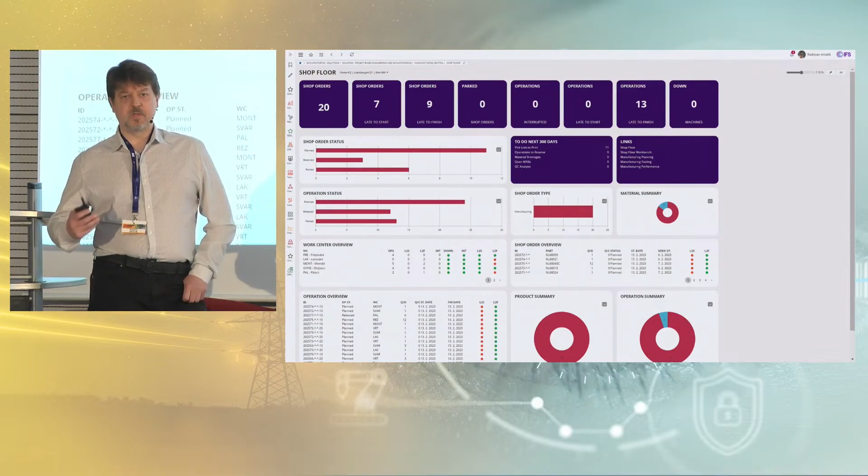This system works on the principle of controlling processes on the basis of exceptions, because the things which are running well I don't have to work with, but I have to deal with those which show a problem, for example with employees' attendance or other issues, so that we can find the cause.

When we received this new generation, we were quite excited, because it was an application which is able to control the entire life cycle. It means that this is no longer closed in a box, but a system which can control any processes, any areas, starting with an idea.

As an example, take a company which develops, supplies, installs and services different technology, production lines, etc. Such a company works with all the processes: development, design, production, and servicing. Now I will show you the phases. These cycles can be supported by a uniform system.

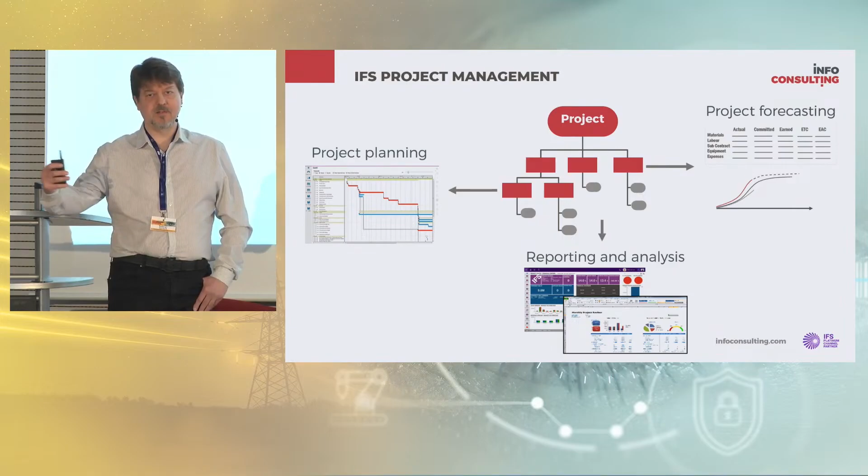The IFS project solution is based on the fact that all the processes connected with the implementation, not only production but also preparatory phases such as design, structure, TPV, and installation, supply and installation, are all controlled within the project. There is a possibility to follow project activities and create forecasts, project costs, project revenues, so there is always information available on the current status of the project.

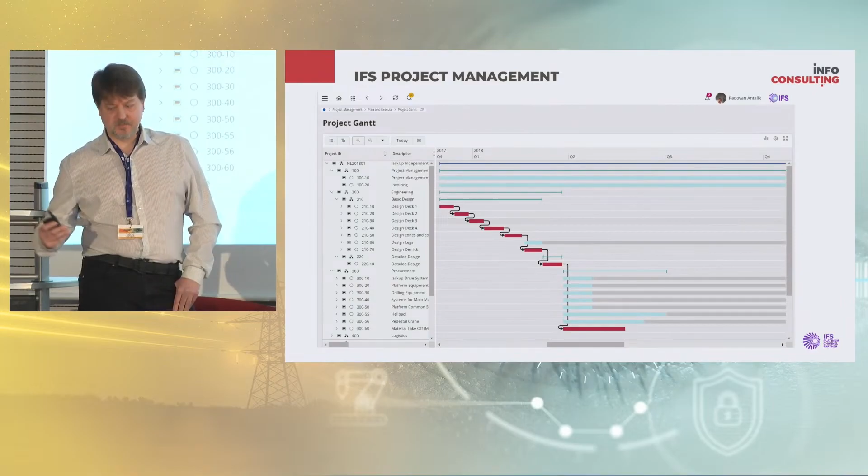And this is what it looks like. The project management looks like this. We have some project activities which have their own deadlines and estimated hours, and within the project management there is an allocation of resources.

There are some specific designers, and one designer can work on multiple projects. You can find out what designer is working on them, which projects he or she is working on, etc. I started with the designers, and now I will talk about the next phase in the life cycle, which is the development.

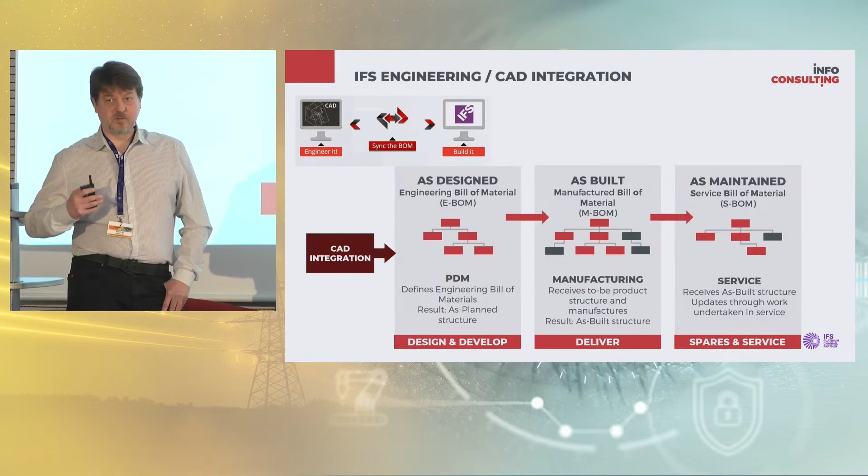At the beginning, when we start the project, we need to prepare the production documentation. New drawings have to be made, new models have to be made, and in this process the system integrates all this construction data.

The life cycle of the product is based on the fact that there are three types of structures, three types of bill of material: EBOM, MBOM, and SBOM. The bill of material data is then supported by the technologies, and the production documentation follows, according to which the production starts.

In the production process, changes occur because the customers may require change, the designers may require change. So in this moment, the actual bill of materials is used, and the serial numbers are followed, the batch numbers, and you will see how the production line was manufactured for a technical equipment of some kind.

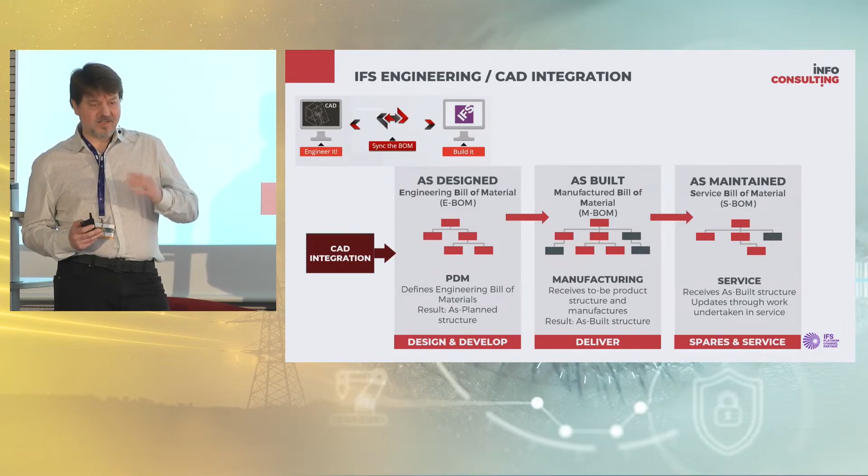The bill of material which was established is then reflected in the service structure, and this is the service bill of material, for the equipment to be able to be serviced. You can see there was a serial number, and everything can be found in the system, until the equipment is out of service and decommissioned.

In order to make a comprehensive control of this process, IFS has introduced a methodology called project deliverables. The principle of project deliverables is the bill of material, which is the order where you upload the data. The project deliverable is related to a project plan - what time, what branch, what section you need to process. On the other hand, design transfers data to the system.

So that based on the data you can start the production. The principle is that you don't need to have the whole bill of material ready, not all the layers, but gradually you can keep adding the parts in the project deliverable, those that have been configured. This project deliverable is then how you can start procuring and producing based on the design documentation, and plan the deliveries to customers, shipments that need to be delivered on site, and of course work orders for the equipment to be commissioned at the customer site, to go through the factory acceptance tests and all other things until it's been put into use.

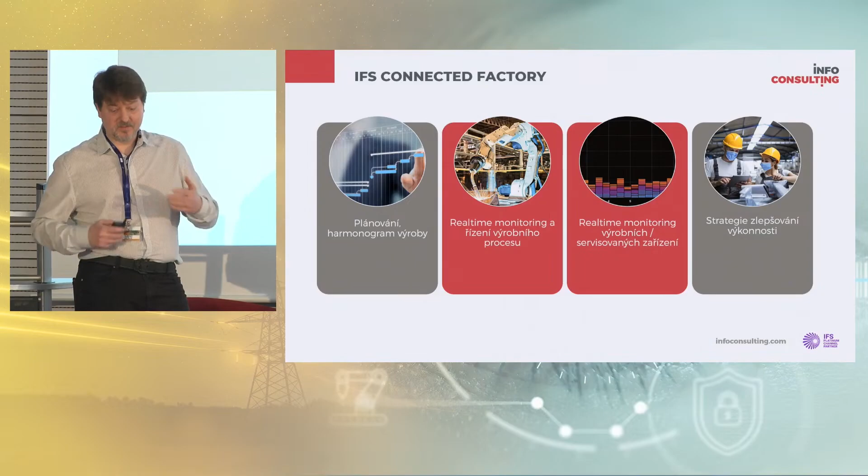Then we have real-time monitoring of the production process and related production monitoring, and then with the incoming data from production, the system keeps evaluating the data and brings supporting data for decision making and for improving the efficiency of the production process.

So the solution itself is part of a single system. So the user in the production uses a single system. The advantage is that the data is consistent, so you don't have complicated business topics, no interfaces.

So this system can also integrate some third-party solutions. So this is an open system enabling cooperation with other software.

Another benefit is the cost of the solution and the cost of maintaining the solution, because you have a single vendor, single provider that also provides the servicing. So you only communicate in one direction.

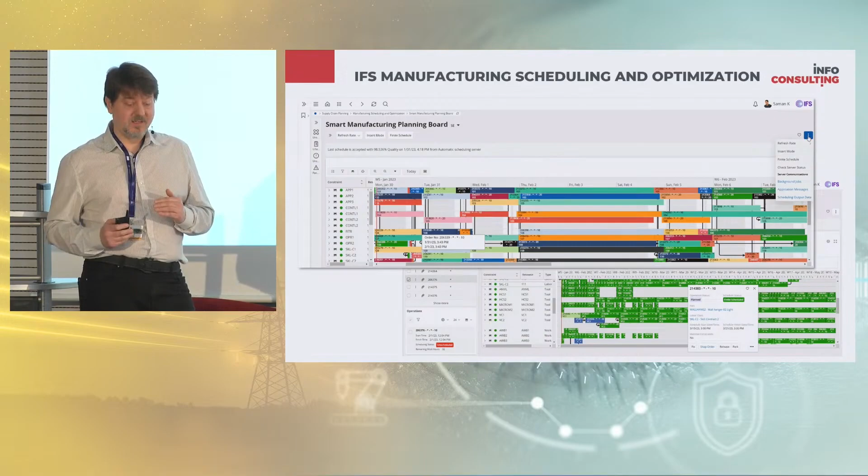So if you look at the details of the components of the MES system in IFS, of course a very important layer is the detailed capacity planning, where the system keeps evaluating, rescheduling and changing the production plan based on the accessibility of materials, machine availability, manpower availability, or tools availability that are needed for the operations.

And as a result of this detailed planning, you get a real-time operation line for each production workplace, so the data is immediately accessible for the workshop management, which is a tool running in the workshops where the foremen really work with the operation line, with the queues, and they manage the system based on the data collected on the shop floor.

And of course, the data can be collected by the operators if it's some human work. It's also very important that once you have some production facilities integrated in the system, the data flows to the equipment to know what programs should be used in CNC machines and so on.

And on the other hand, you get information from the machinery about the production, and you also get information about the diagnostics of the equipment, so that the maintenance staff also has information about the condition of the equipment.

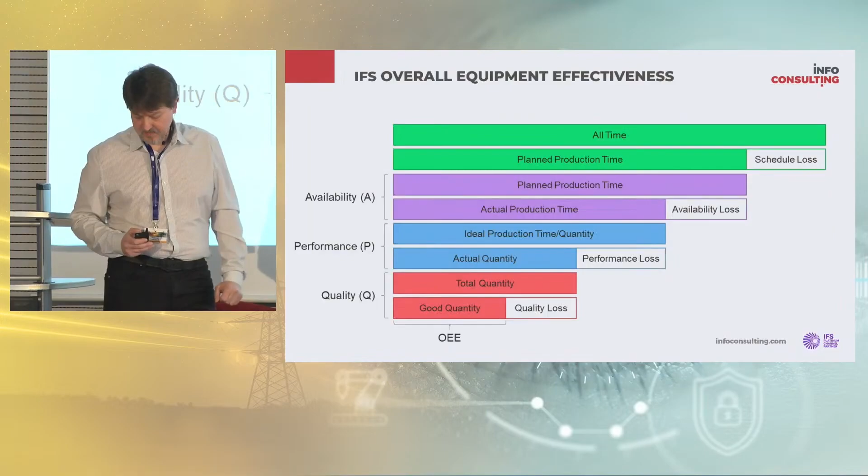So the operators can use a workshop panel. This can also be used on any device, mobile phones, tablets, and on the huge touch screens located on the shop floor. As regards data collection from the production equipment, the greatest benefit of the monitoring is...

OEE. So this is when you evaluate the availability of the production machinery, meaning how long the equipment was in operation, what was the downtime. And this is, of course, related to production, where the system evaluates the production, how much has been manufactured, and the losses.

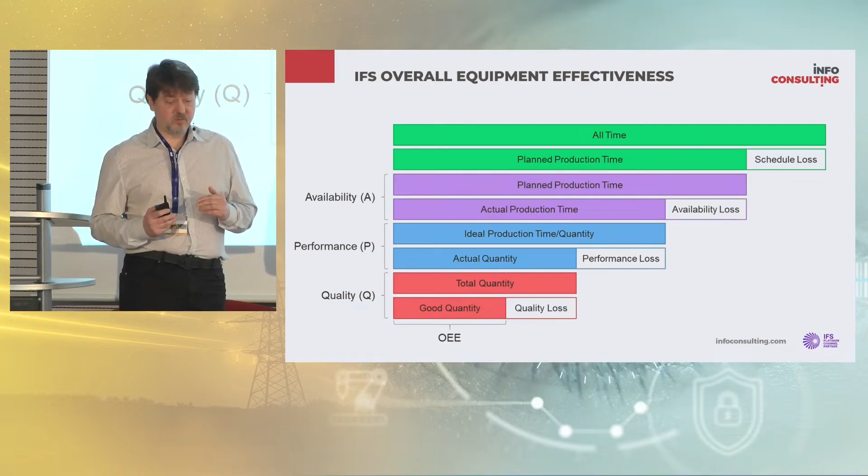And the last indicator is the quality. So this shows how many produced pieces were good, and the number of faulty pieces. Then you get a calculation, and the production managers get a detailed analysis of the condition of the equipment.

Another important component which starts being implemented at the stage of development is quality control. And this is based on FMEA, where you can already specify some potential errors or defects in the processes, and based on that you can identify the causes and take some preventive steps.

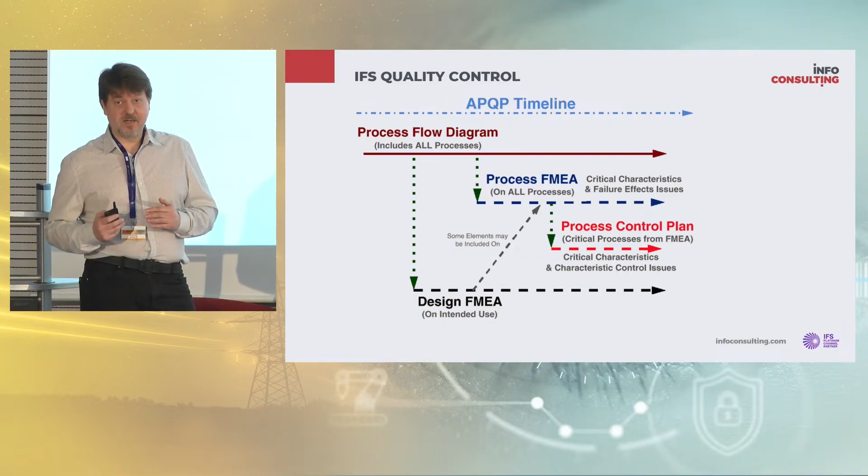So this basically shows what should be checked, and the process control plans give you the details of what should be checked. So the result of this check at the input or output is some statistical check of the process in real time. So you get real-time specifications that graphically show you the condition of the components used in production and the fluctuation of quality and deliveries from the suppliers over some period of time.

And the last important part of the IFS solution is maintenance. Again, this also uses data coming in from the production machinery. So the maintenance has its own catalog of spare parts,

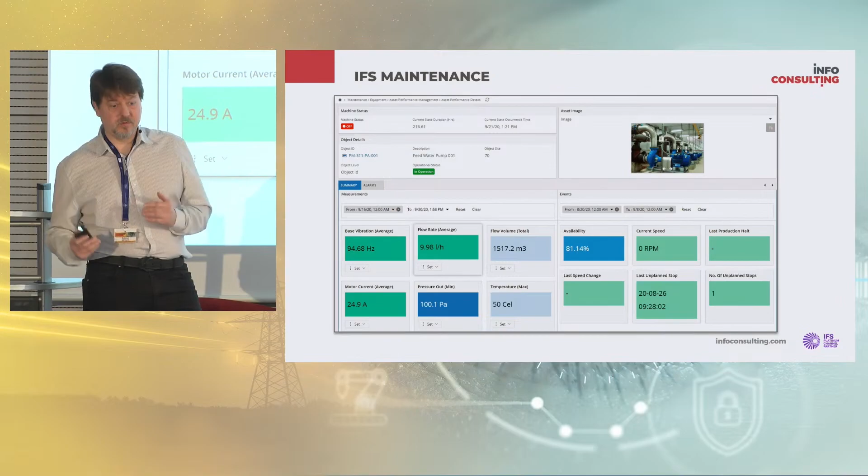the set of equipment that is being maintained, and you get an overview of each piece of equipment and the parameters that you need for the diagnostics, because based on the parameters you can carry out preventive maintenance, which means that if some piece of equipment gets some value change, then you have to interfere because there could be some damage caused.

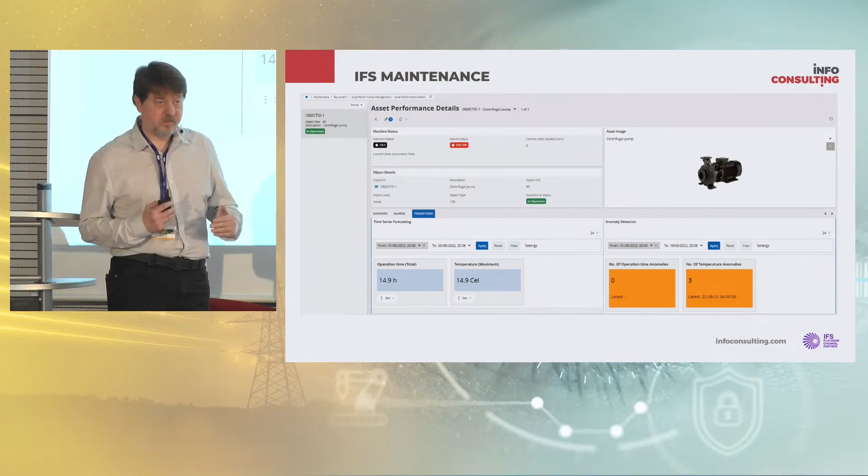What is also important is to have an overview of alerts or alarms, exceptions that deviate from the normal situation. And what is also interesting is that the system can also use machine learning and AI elements to make a prediction of these values in the future. So for the maintenance staff, it means they can predict what could happen in the near future if some important values change.

So the last stage, we have the produced and delivered equipment, then you have the servicing stage. The servicing module under IFS is a comprehensive system managing all services related to your own equipment servicing, or used by service organizations that have service level agreements. They take care of halls, equipment, buildings, trams, whatever.

This service module works in a very simple way. At the beginning, you have a request for service. This is processed in call centers where these requirements are recorded. Then it's sent to the control room where the staff processes the requests and tries to allocate them to the service technicians.

We use three types of plans and planning. Number one is the short-term planning, and then there is the medium-term plan, where you can see the projects, what the customers will desire, at what time, because you have to allocate the capacity for this. We also use strategic plans. By this we cover the basic plans, which is the planning and scheduling.

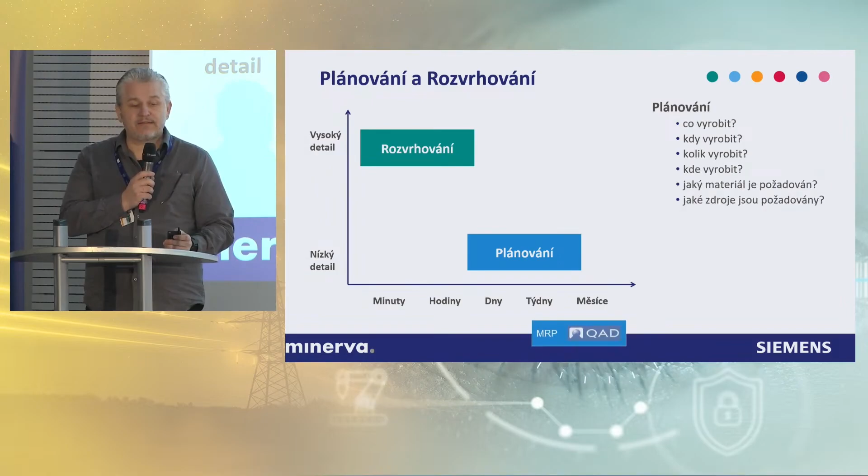The planning answers our questions about what we should produce, where we should be producing it, how, what resources are required, etc. This is what we cover by the standard MRP system by the QAD company, and the scheduling about how best to produce, how best to get operations together. So it is here.

I will show you that what has been said here does not always have to be connected to the ERP systems. It can also be independent. If we take standard planning in the ERP system, it depends on many other departments. So what do the customers want from us? We need to have well-done structures, optimization parameters, stock or material in progress, production in progress, and any department that supplies bad data into the systems will cause the planning to be non-operational.

So if the ERP system fails here, you'll change to the second most frequently used information system, which is Excel. Excel is widely connected, and it substitutes for the inconsistency of the data. It is always desired to enter good data into the system in time. If you omit one of these requirements, it will be a problem.

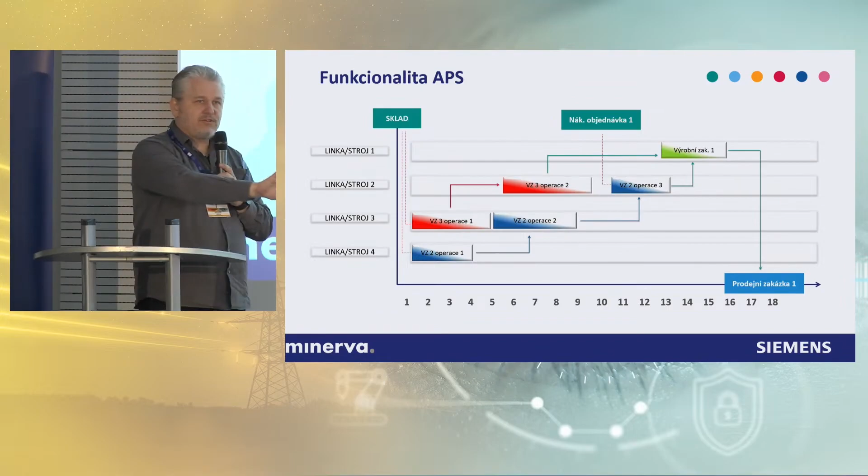At the engineering level, you have a lot of bills of material. Sometimes there is installation, assembly, and this may not include the planning across all the steps. We always try to do it within 1 year. I mean now the planning, any drawbacks in any part. So during replanning, the system behaves in a certain way. This is another functionality.

I will put the examples of each customer, and you will see what the system should be able to do. It should be used for planning finite capacities. We can use it for cooperation and its purposes. It should be able to plan the secondary purposes. You may be missing something. Most often it is that you lack people, professions, but we also had to deal with the shortage or non-existence of the crane or some tools or anything that can prevent you from doing the work to be done.

The supplier should have experience with the supplies. When we spoke about TDK in the morning, they found the solution as they wanted, and then they were trying to find somebody who would implement it. We had employed a lot of software then, so we won the tender. What can I help you with?

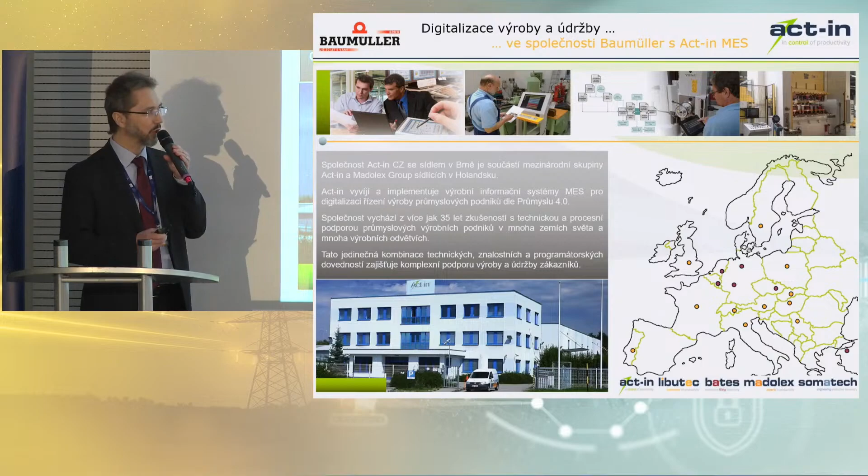And we spoke about what our company did, that it had an implementation center here in Brno, that they had some experience, ladies and gentlemen, who have a deep knowledge about information systems, and that in addition to being able to implement it in the Czech Republic, we are also able to implement it in corporations across Europe, and our colleagues go there.

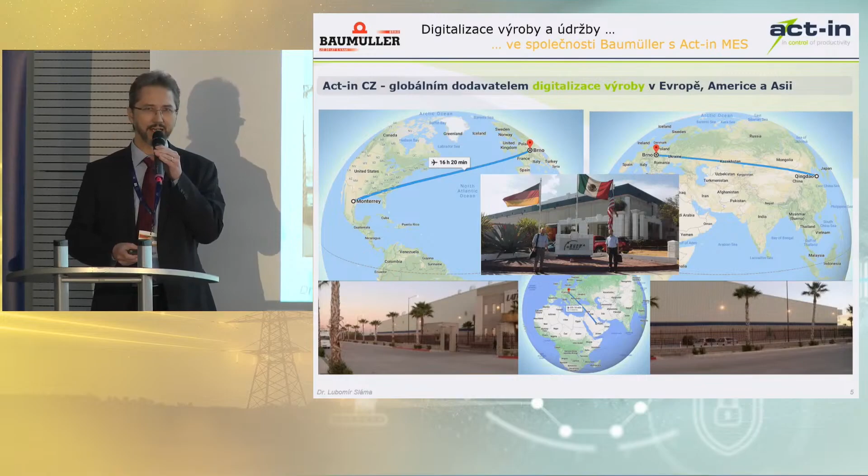And in addition to the implementation in Europe, we are also able to implement the system in the United States, Mexico, China, or Saudi Arabia. So we are a global supplier of production information systems. Most of our customers are in the automotive. They could be subcontractors, suppliers of car parts, or sub-suppliers in the aviation industry or in many areas.

What was important for Baumüller company was also that we are able to deploy the system into other companies of this parent company. So we have here the machining, there is the foundry industry or other areas which we are active in, such as plastic production, medicine production, which has high demands for the cleanliness, for example, printers or other industries.

What's important is that within MES we collect data from different automatic lines, manual or assembly lines, or fully robotized workplaces. MES is integrated with different types of technology in terms of the collection of the data and the final recording of the data and the checking of the technology.

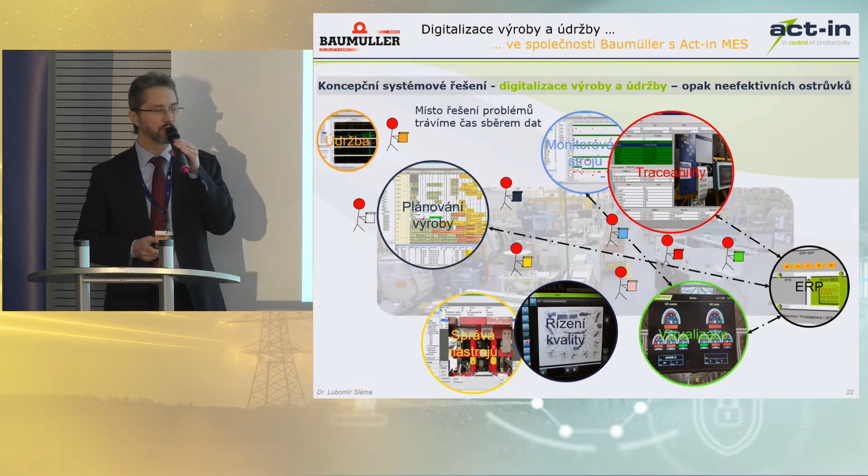The result of the digital transformation is the opposite of inefficient island solutions, where the MES system brings integration into the company within the systems the customer has already used. Everything is driven by the central data collection, which is a central motor for the digitization of the production. This was the supplier's comprehensive approach, and now I'd like to pass the floor to Mr. Šamšula to tell us how they use the system and how they approach it.

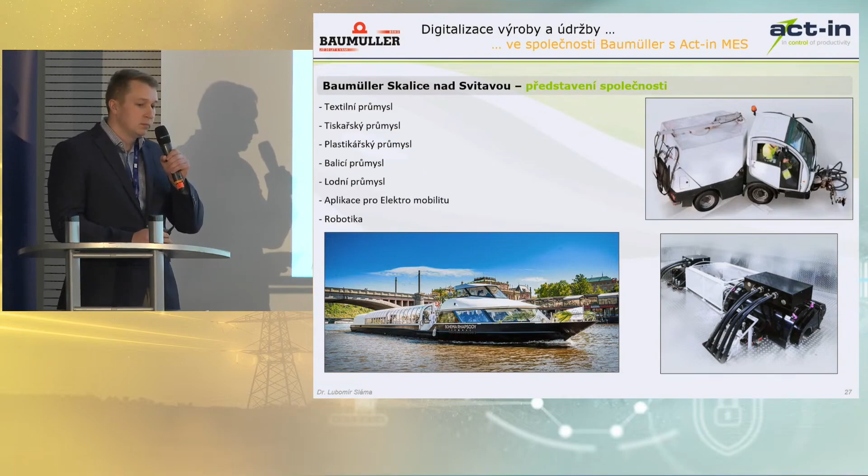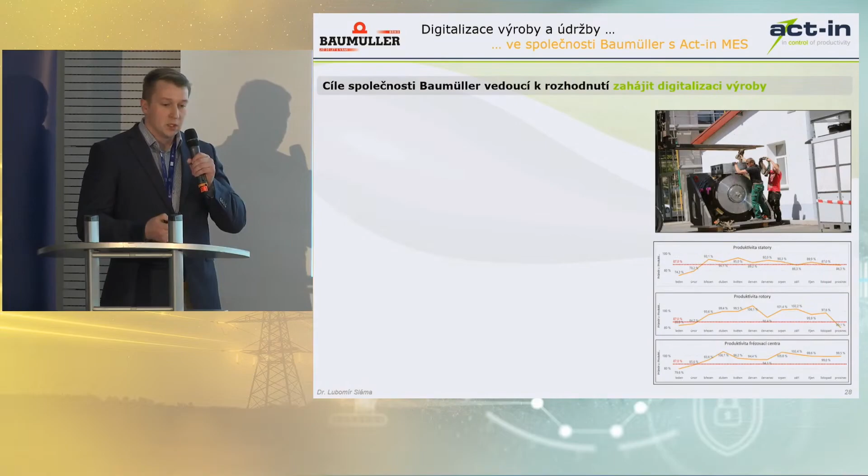If you look at digitalization globally, what led us to digitalization? What was the driver? Well, in fact, we wanted to meet the visions of the company. We wanted to increase the production capacities. We wanted to make better use of the existing production capacities. We wanted to ensure the increased productivity of the manpower, and we wanted to get rid of the paper form of production management.

So, of course, we need to reduce the downtime. We want to improve the quality standards, planning, and we also wanted to increase the efficiency of maintenance.

So the main criteria. So, in fact, we had two of them. We wanted a company that could provide a comprehensive solution. We didn't want to focus primarily on production. We wanted to cover the technologies, quality, maintenance, which was provided by Act-in, and a company that has experience with their implementation in production. We wanted to be able to read data from the ERP system and the planning system Preactor, which was presented a while ago.

And in order to be able to collect data, reports, analysis, because this is the bottom line of digitalization, to be able to get the information from the systems. Another thing was the speed of implementation and support to be provided by the vendor.

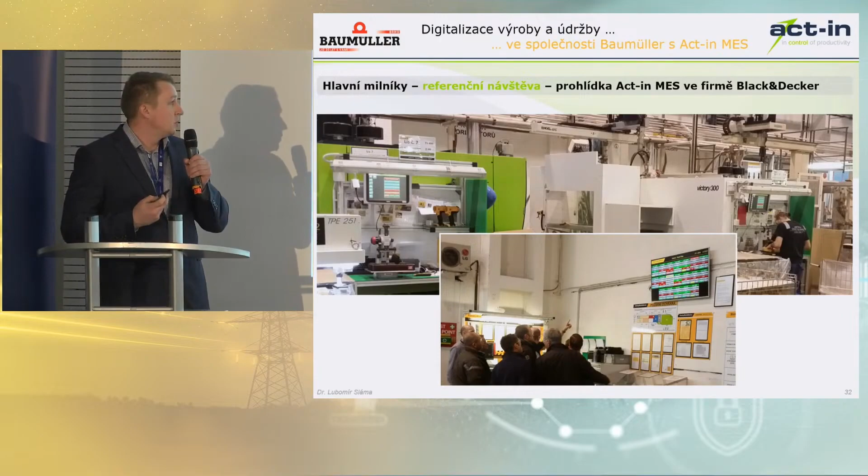So this was the reference trip to Black & Decker in Ústí nad Labem. We were quite impressed. We witnessed quite variable workplaces, so we could see some molding presses, some tool machining centers, and what was quite important to see was maintenance, because at that time we only used some spreadsheets. It wasn't efficient at all. So this was another milestone and driver why we decided to go for the stage of implementation.

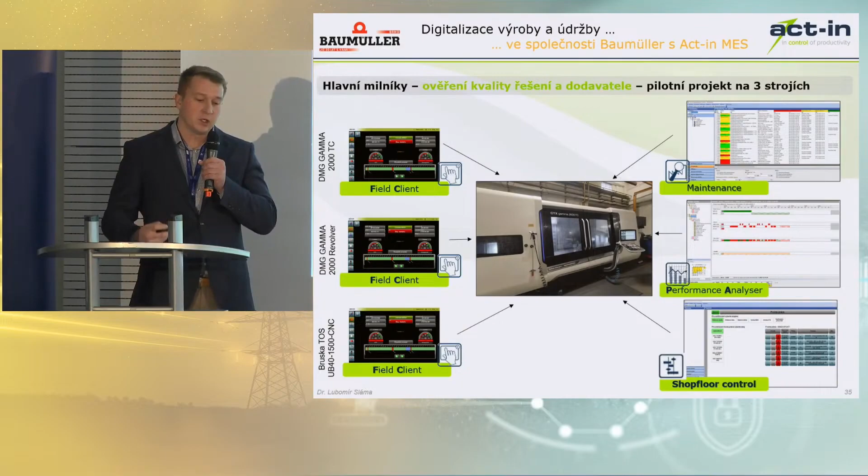So if you look at the pilot project, we basically applied 4 main applications. Field client, this is a client who is at the workplace, at the screen. Then maintenance, which was a comprehensive solution to the maintenance. Then performance analyzer, and in fact, this is an application where we analyze all the data concerning the workplaces and the machines. And shop floor control, where we deal with the quality instructions and so on.

So this is an example of the main screen for the operators, where we are able to see the orders. We can see what is being done, who is logged in. So this is a comprehensive solution where the operator can communicate with us, with the technologies, with the manager, with the maintenance, and so on. Then we have a definition of the reasons for losses. So this is one of the options of the field client.

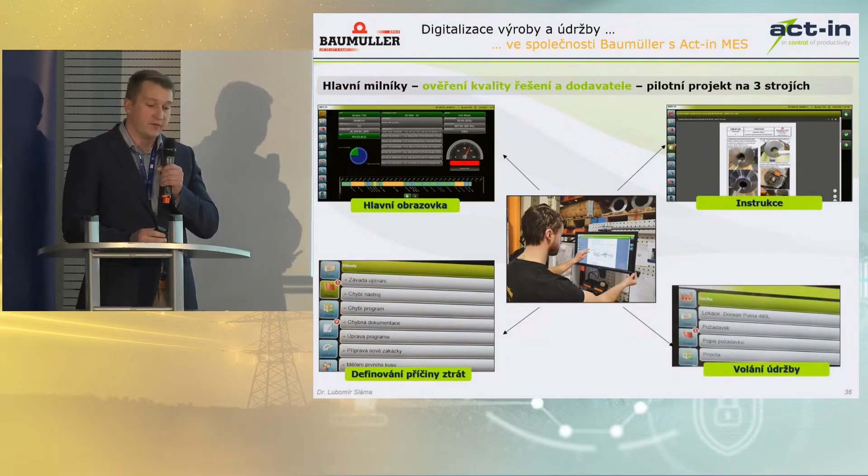So the way it works is that we have a definition saying that if the downtime is longer than 10 minutes, then the operators need to give us the reason why it has happened. I will show you some more details later. Then instructions, which is all controlled documentation, all in digital form. We have no files with paper. It's all digital. And for the quality department that is in charge of that, this makes their work a lot easier. And we can always call up the maintenance staff, which is again related to the maintenance project, as I will show you later.

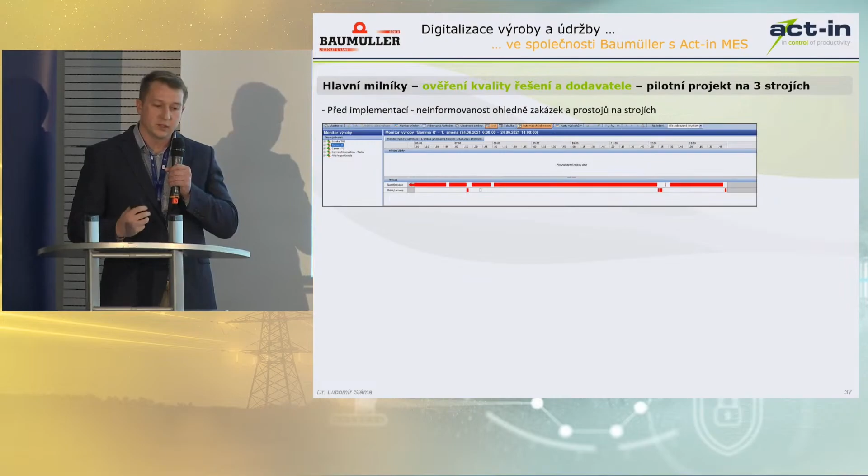So this is just an example when we implemented the pilot project. If you look at this, the red lines don't really say anything, but this is, I think, a morning or a night shift in the company when we implemented the Act-in system. I wanted to be smart about it, so first I connected it to the system. It was up and running for a month so that we could collect some data before entering the panels, when the operators already use the field client.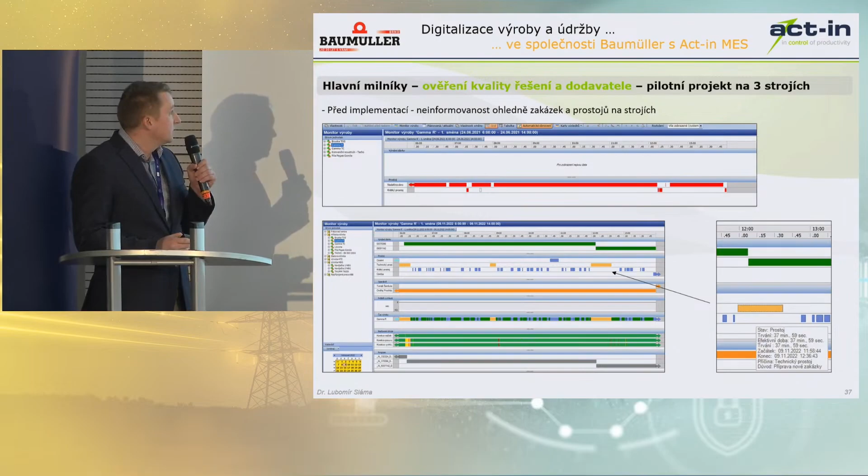So if you look what happened later, this is about 3-4 months after the deployment. The green lines, this is the production, and then at the bottom there are no red charts, and this shows production where all the downtime is eliminated.

So the pilot project, then I will talk about all the applications in detail. As part of the pilot project, we had maintenance, which was a communication across the company and maintenance. So we implemented a website interface, so anyone from the company is able to send a requirement, and then it's sent to the Act-in maintenance system, where the head of maintenance can comfortably allocate the tasks to the workers in a mobile application. So each maintenance man has a mobile phone with an application, and if there is a requirement to fix a bulb, then the head of maintenance allocates the task to the worker.

So I think that this is quite a good tool, and we were also able to, as I said, detect some downtime. We managed to eliminate someone walking down the corridor. He tells the maintenance, he urges him to do something about it every week, and a month later he doesn't even know he asked for something. So all the requirements are now listed in the system. You can make all kinds of evaluation. You can look at the costs as well, and you can basically monitor the entire task.

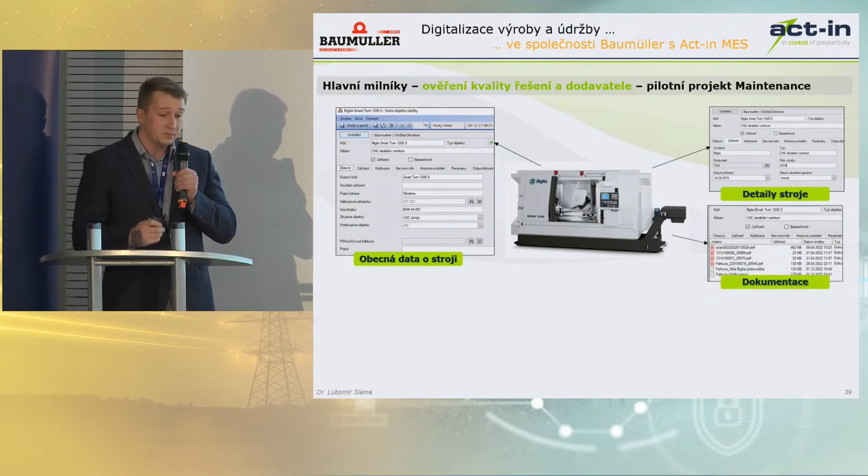As regards another feature, maintenance, currently we can have all data in one spot, which is great. We can have general data about the workplace, about the machine. We can have all kinds of calibrations, the date of acquisition of the machine, all the way down to documentation. So now we can record all the inspection reports, all documentation related to the workplace or the machine, invoices, and so on.

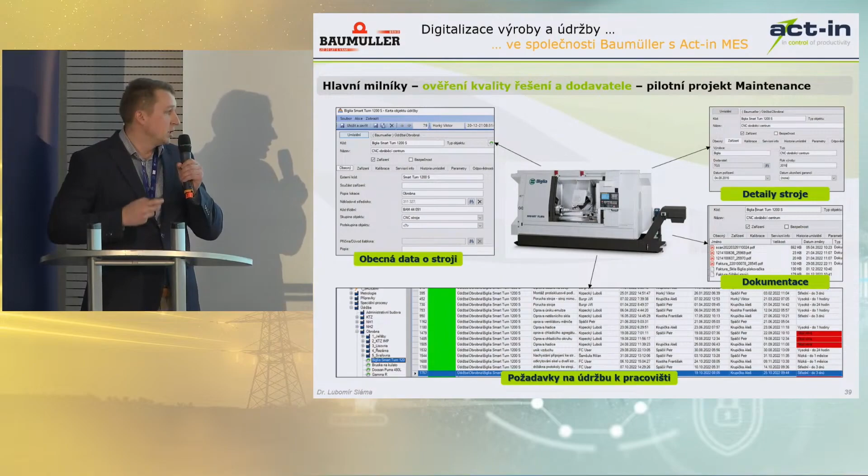So the last thing there is communication with the machine. So the operator has a panel. If there is any issue, he can push 2 buttons and he can call up the maintenance staff. It works very well because we have a definition that the machine is in downtime. So if there is a serious failure and the machine is not available, then it's an instruction for the maintenance man to react.

If we look at the main stage, because this was just the implementation of 3 machines plus maintenance, once we made the evaluation, we decided to implement it for the machining centers, and the efficiency went up by about 15% just by implementing some communication panel, efficient management of the instructions, maintenance, and the downtime. So we decided to roll it out to all the machining room, which is about 30 pieces of machinery. So we use software and maintenance, performance analyzer, shop floor control, field client, and plant view modules.

So how is it connected? We have one central SQL database. It is the brain or memory where we have Infor connected. Infor is ERP. Preactor is the planning system. Then there is Act-in. Then we have Power BI where we use the data to visualize this.

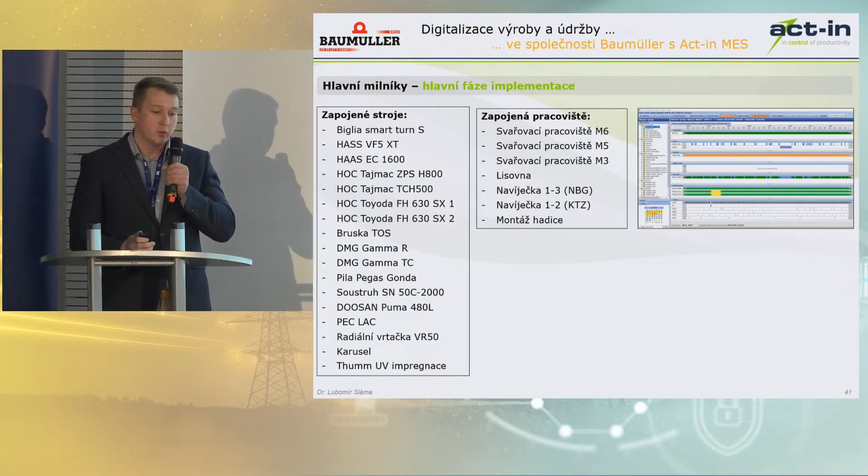This is a short overview of the variety of our machines. So you can see that we have a great range of machines. Biglia, HOC, grinders, DMG, Gamma machines. So the connection was not very easy. We have so many control systems. And we also have the manual workplaces connected. So they are not control systems, but it is done through the panels.

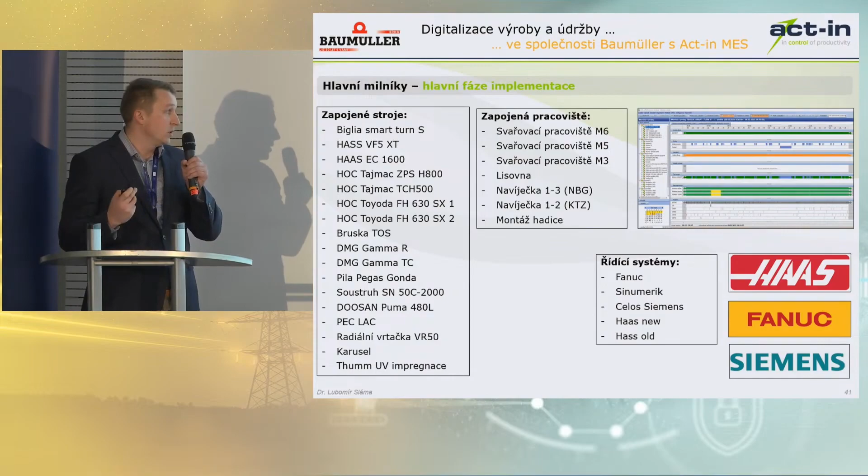And here you can see the control systems which are able to be connected: Sinumerik by Siemens, Celos, Haas, and of 2 versions. This is just for your idea. These are traditional equipment like DMG, Gamma R, HOC, Toyoda, or the grinder. We also have some older machines, radial drill machine, or the lathe. And it depends how Act-in MES can connect.

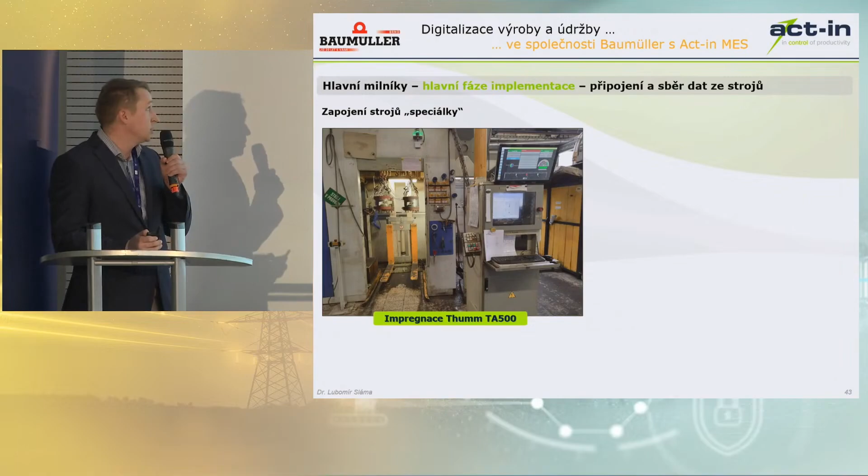It is quite amazing. Mr. Zuber mentioned this in the morning. This is impregnation equipment. It is quite a difficult equipment with a lot of data and a lot of elements, how the machine works and operates. We have a lot of data here, and this also enabled us to increase the production by 20%. This is the heating furnace with the tests, and we are able to use such equipment.

In terms of the application that we use, number one, it is the performance analyzer. This is the application where we read data. It is online. Here we can see all defined things and tasks that we need. If I take it from the top, we see the production orders, what the machine produces at a certain time. Then we see short and long idle time. We have it defined as short and long.

The difference between them is about 7 minutes; if it is longer than 7 minutes, we ask employees to justify why it was idle. There are some technology issues, change of the measurement units, etc. Then we are able to read the corrections of the revolutions, shifts of the speeds and programs.

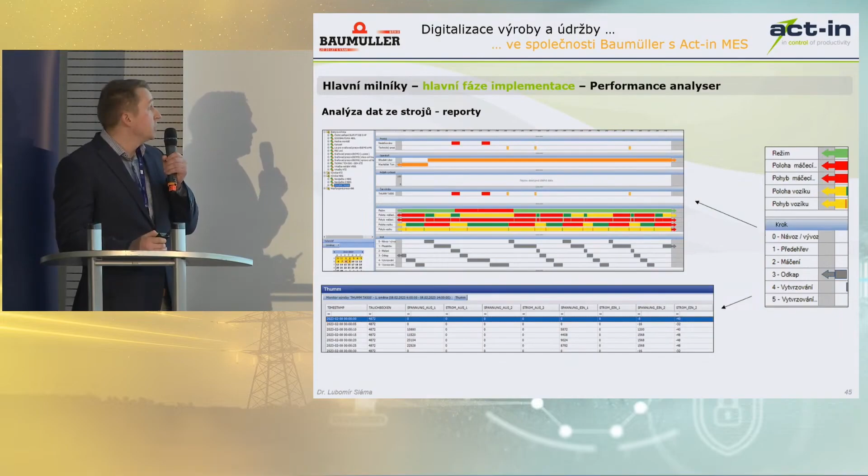It is also interesting because we've seen a traditional example of the fact that when there is no foreman, all corrections went to 20% because in the evening it was necessary to have a rest. So this was eliminated, and we are able to read even more detailed data, and the company Act-in MES is able to give us some custom reports, which is very important, particularly with respect to this impregnation, because we needed a lot of information, and this is different for each machine.

Just for your idea, we have the reports. I usually use 2 types. One is for 1 day.

We are able to look at the technology, what was there for one shift. Here you can see that it was 10 minutes, like replacement of the parts took a certain time, and the technologies then can do some corrections.

Down here we can see a weekly report where we deal with OEE, which is the speed, availability and quality, and we are able to work with the data and use them, for example, for savings.

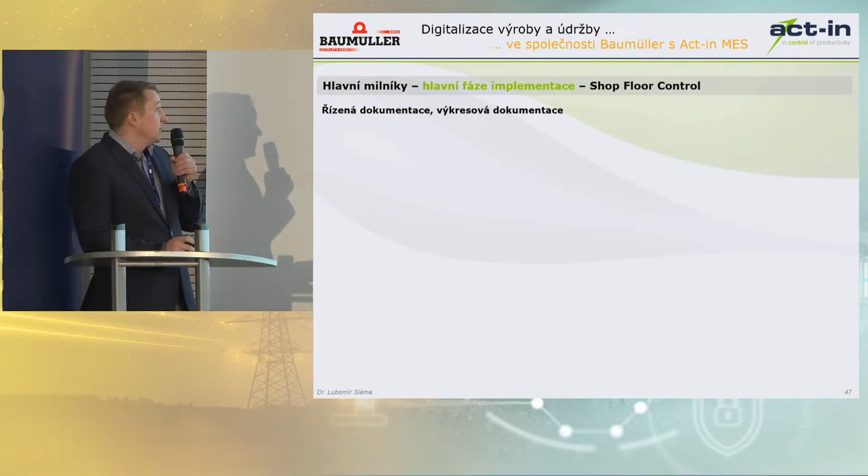The next module is the shop floor control, and we use this application to control quality.

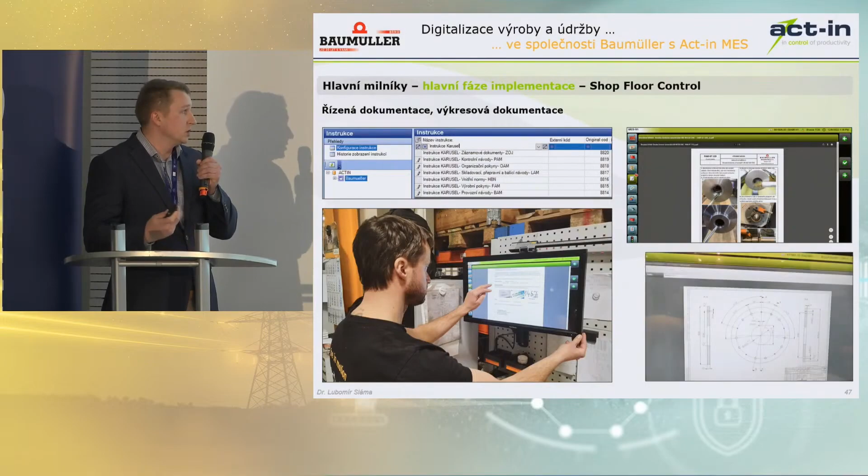We see here that we are able to include all digital forms of different instructions, control documentation, photographs, and drawings.

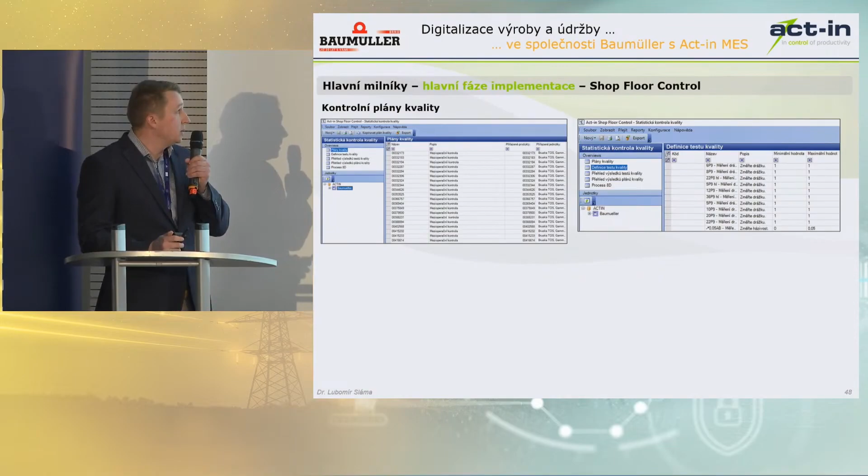The main task of quality is to inspect, so we have the inspection plans here with regard to the articles or issued parts. It is then transcribed into the screen where the employees fill in the values, and we are able to work with the data.

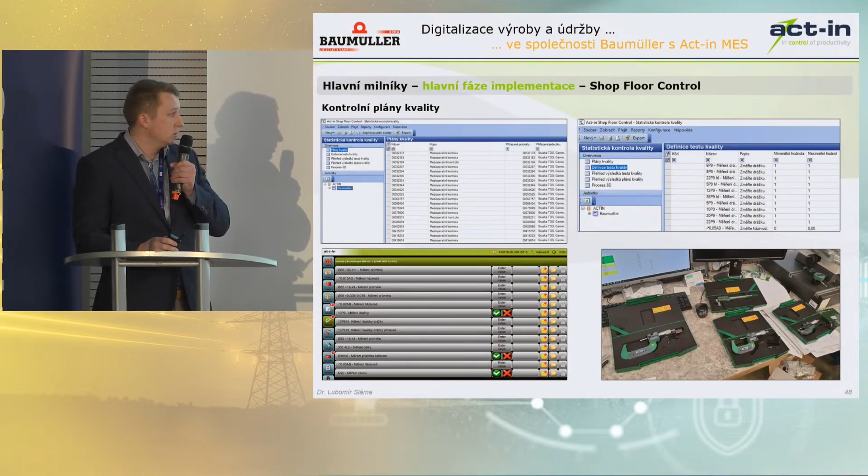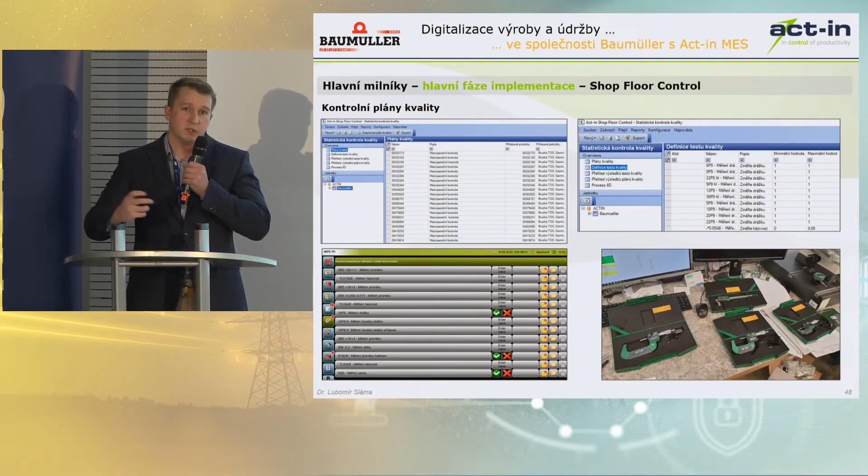And last but not least, we have a new development where we use digital units for measuring, for confirmation and recording into the database.

Another thing which is quite new is that we improved the module in terms of planning for foremen.

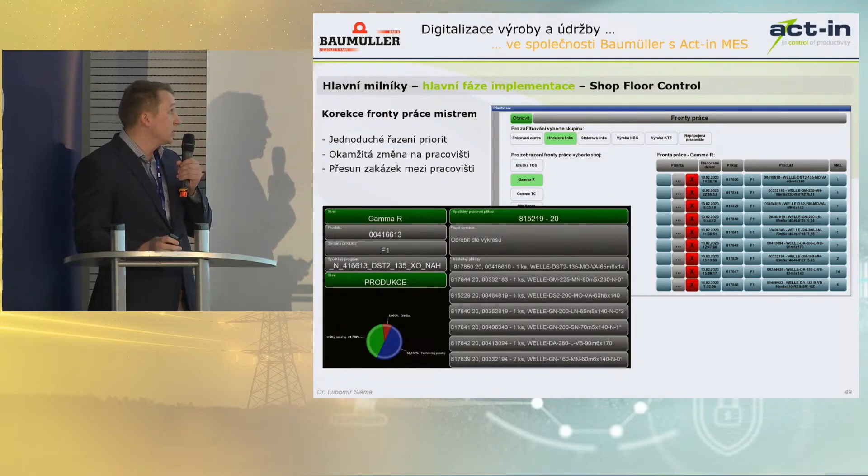When the planning takes place, we plan every day and always in the morning if there is a priority, or the plan can be modified, so the foreman can go to shop floor to go to the control or inspection, set up the order according to the priorities, and it is immediately transcribed into the digital form and to the panel.

The next excellent thing is Andon, which is the field client function, where we are able to communicate across the whole company, where the employee who needs to speak to the team leader will set up a task, which is then connected with

email, and we have now the logistics set up, we have the team leader set up, we have the technology and the quality set up. So anything that the employee needs to deal with will call whoever he needs.

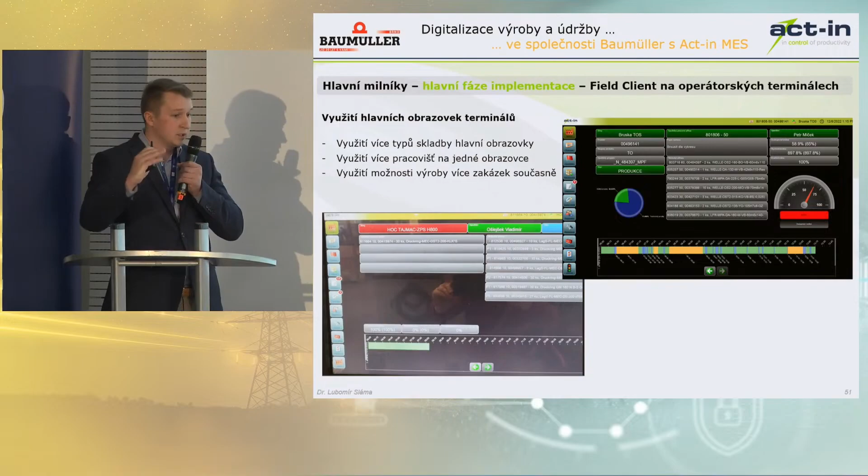There are two more types of screens. We use about 3 at the moment. When we have like 3 workplaces, we don't need 3 monitors. We can do it in such a way that they just switch over.

We also use the so-called paletovka, where they have a double production running in parallel, and within Act-in it can be downloaded, and we can see the analysis of two projects.

We also have autonomous maintenance, and this ensures us the better OEE or the availability of the equipment. One module is for the person, if they have a problem, so they call the maintenance, they record the detail. The maintenance person already knows what the issue is, and another thing which we use is the autonomous maintenance.

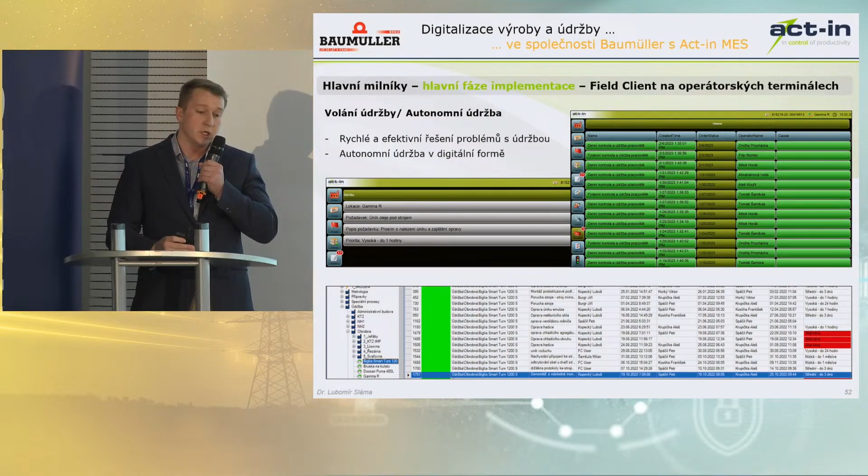At the moment we have the daily cleaning or service of the machine. So there is a history, we can see the recordings, and if the foreman sees that not everything is in order, he can see whether he can make some other measures.

Everything is transcribed into the database. We can see all the tasks here. We can see an extreme quantity of the data from somebody who issued the requirement and who did it.

We will now proceed to maintenance. We are not using it only for maintaining, but we also have other modules that I'd like to show you. This is the controlling of the whole company using the application.

Another thing which we use is the documentation, which can be found in Act-in. It is within the maintenance. They see everything in the mobile phone, so they don't have to bring any files with them.

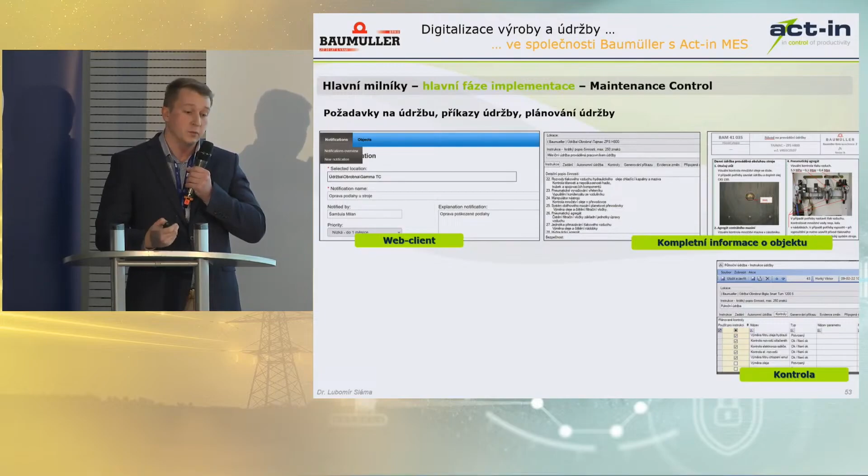So if we have a check plan within the half-year revision, we have a list of points the maintenance person has to cover, and we are able to work with it and, for example, whether it should be done in different ways.

It is connected with the planning system, and the maintenance person can plan the entire year. By this, it is possible to control the efficiency of the persons.

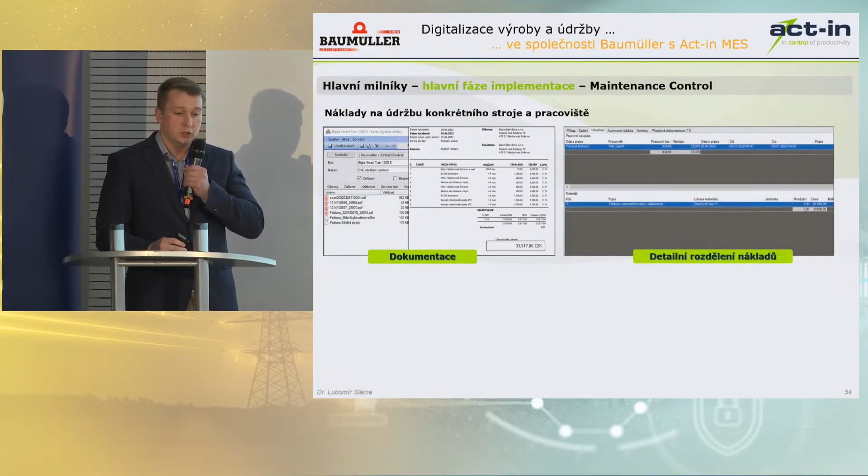So this is the documentation and the asset management within maintenance. If we have a failure of the machine, we are able to record how much it cost.

We include the time. We are able to control the costs of the entire entity.

And then we have a very good, clear summary of the information about the object, and we see also how expensive the machine is and whether we should replace it or not.

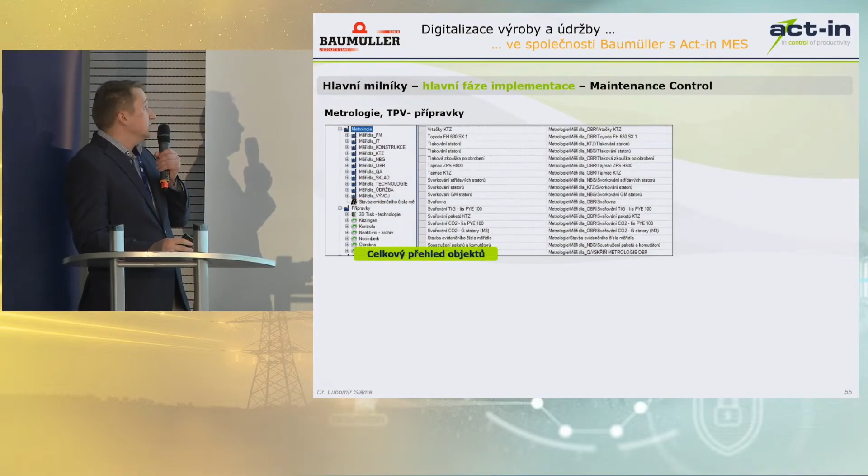The next thing that we use, because we liked the connection, like the maintenance, so we started using it within the jigs.

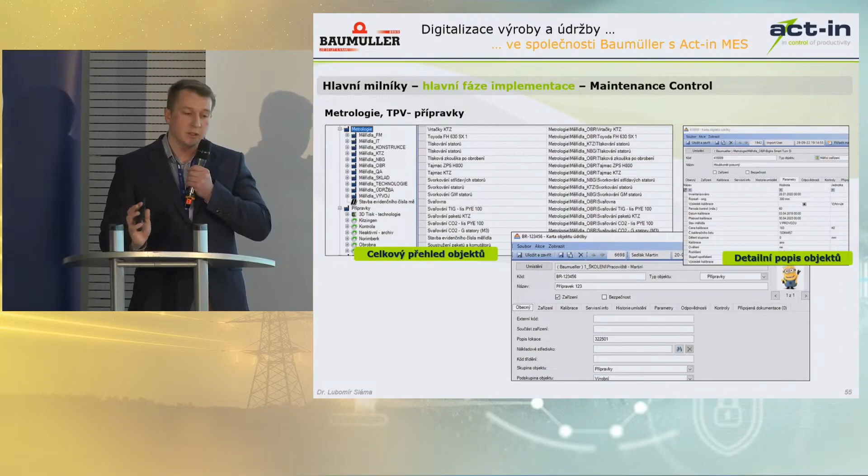So we have about 5,500 jigs and different measuring devices. We like the planning of the revisions of the jigs and the metrology, so we don't have to control it with the databases, and we use all the possibilities in terms of the information, jigs, documents, etc. I have also here the documentation, some pictures and drawings, etc.

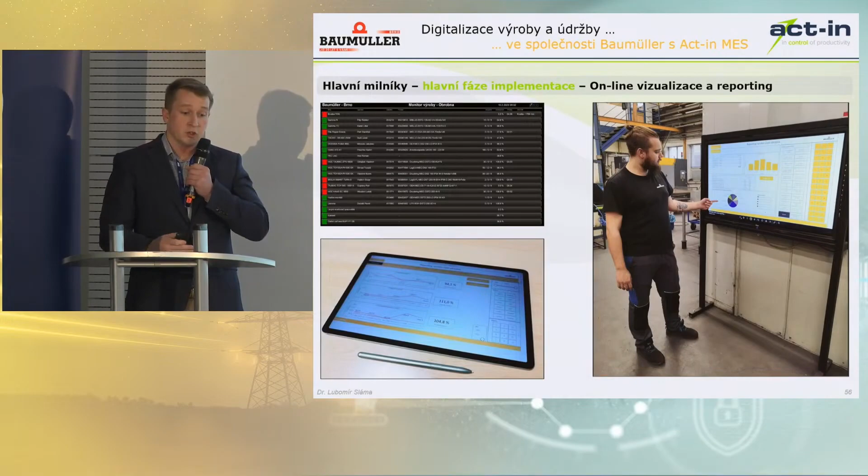The main milestones. The last possibility that we use is the online visualization and reporting. We can see how the machines are currently used, whether they are running or not, what projects they are working on. We also use the Power BI reporting system, which is connected to the database. We use the data from it.

We have the sets every day. Every day we have the meetings of the top management of the entire production. We have the planning, and we deal with the current issues using the visualization.

To summarize it, the entire project has been implemented within the machining shop. We would like to connect more production. There will be another 100 new production workplaces. We plan to digitize quality, all steps, and they will be using Act-in, and also the digitization of logistics. It will be also helpful.

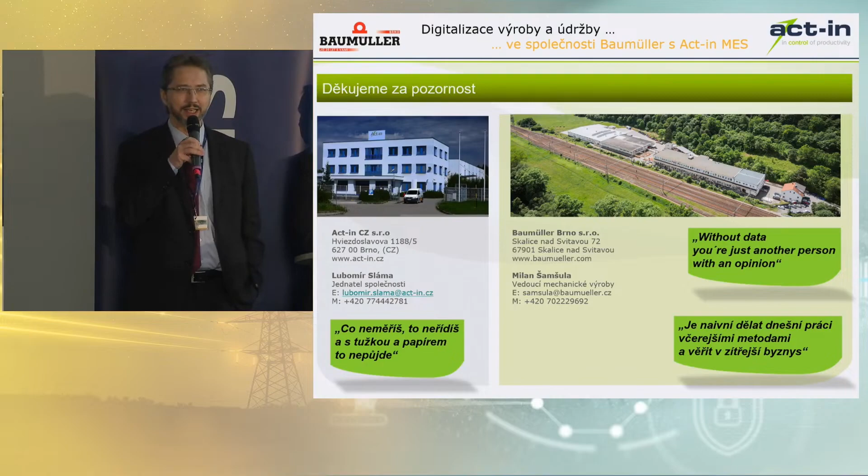Thank you, Mr. Šamšula, for this excellent story and presentation, the story of the user who was at the beginning of the story and who is part of the story. And as he said, so hopefully he will be part of the story in the future. And he showed us what data and what functionalities of the systems he is using as the practitioner from the production. And I think this presentation was a nice follow-up of the morning presentation of Mr. Zubr, who looked at it from the point of view of the top management and controlling and managing the company. That's all from me. Thank you for your attention.

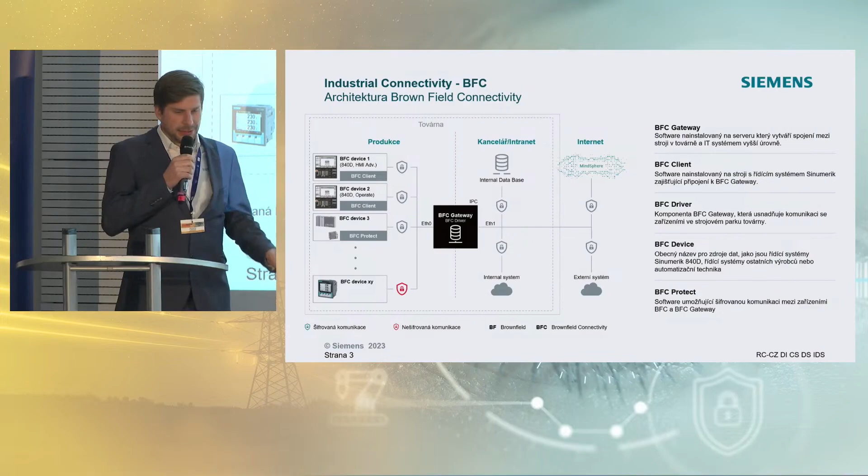I'd like to stick to a more general level here. So, brownfield connectivity without reading data from the machine control system - this should be safe. The communication with the machine, if possible, should be secured, so it should be encrypted.

I dare say in 90% of cases this is not happening - the communication is not encrypted. Unfortunately, I witnessed two cyberattacks on large automotive companies in the Czech Republic, and it completely paralyzed half of the production. This is something that should not be neglected.

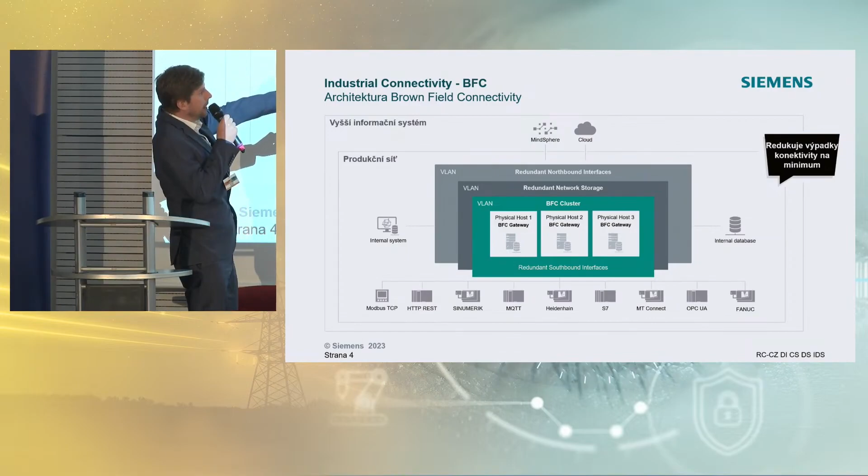We have some terminology - gateway, client, driver - but I don't think we need to go into that. To make it reliable on the side of the machine, the data is buffered. If you lose communication, it's very important that the gateway, or the central point through which all the data flows from the production machinery and also from instruments like SENTRON measuring instrumentation for energy monitoring, is also reliable. So here we support something you may know from other systems, the HA mode.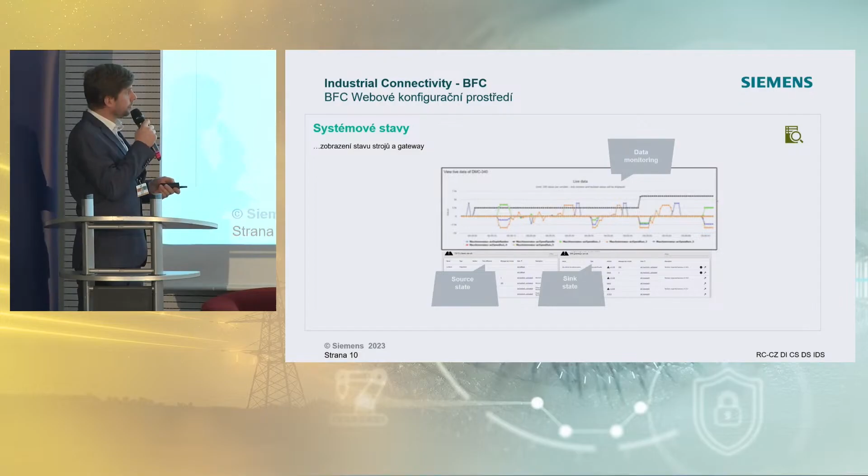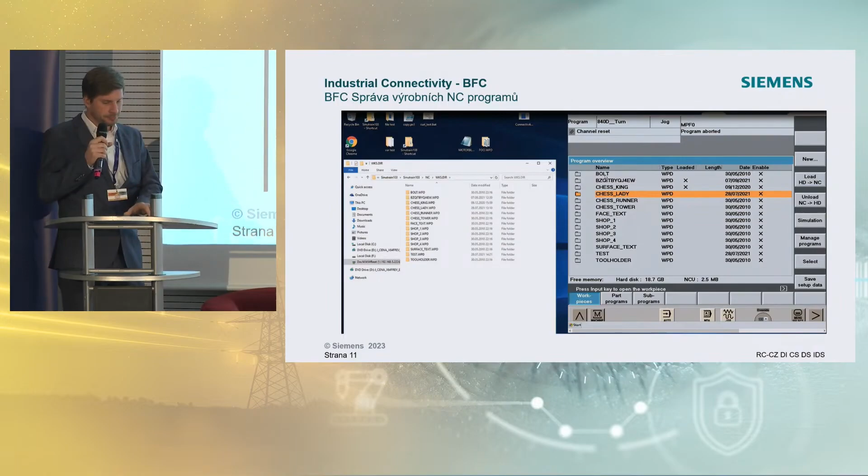I can look at BFC, whether the data comes from the machine. This is the view of the live data. And this is how the report looks of the production programs, where on your right-hand side you can see the workpiece, the directories for the workpieces, and the same is... the production operator has it with him or her, and this is with the certificate, SSL certificate. So the work is very easy with this.

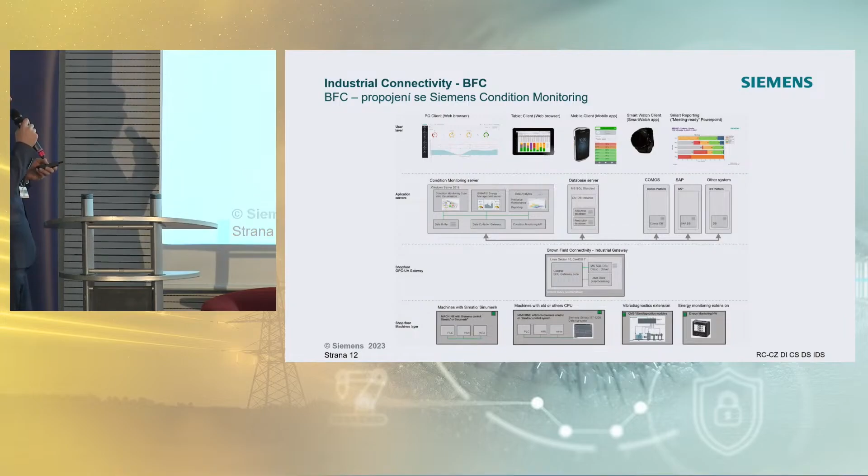Now we spoke a long time about this, about brownfield connectivity, where, if you look at the standard 4-layer model of the data, down here there is a shop floor, here are some machines, and with the machines the brownfield connectivity communicates, so the data go up to the level of the application servers.

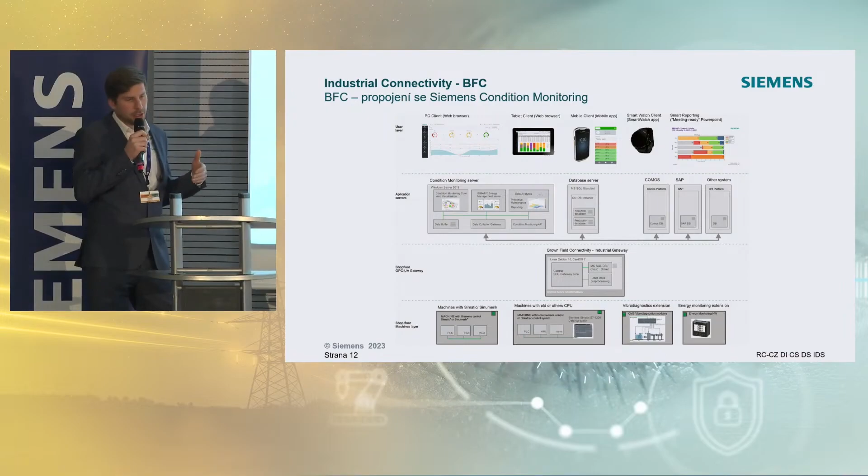And here, if you don't have any solution above that, Siemens offers a possibility to use the condition monitoring system, which then is the nice pictures and all the things the person is working with. So we have the condition monitoring server, which works with the data, or you can send this data into the MES systems. And up here there is what the user sees and uses, and what we have seen here for the whole day. But the path is more complex, and there is a great emphasis on securing this.

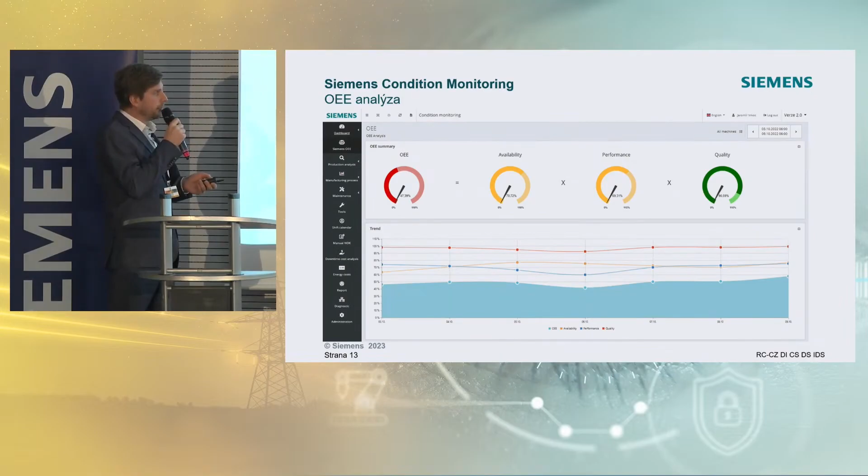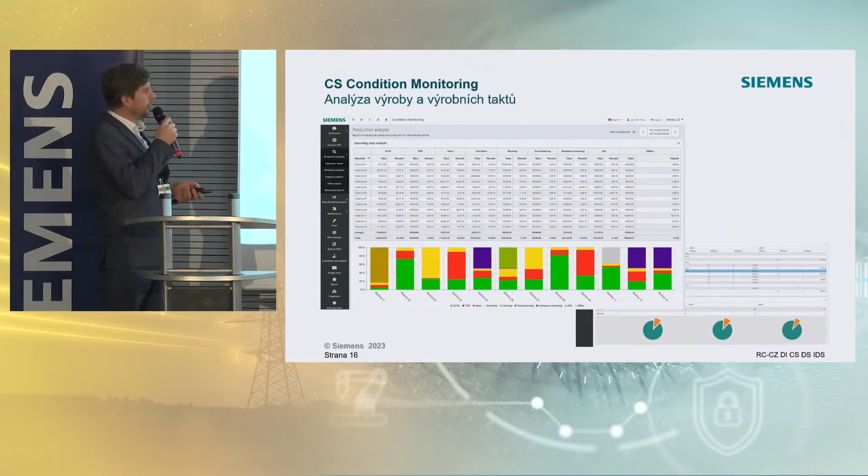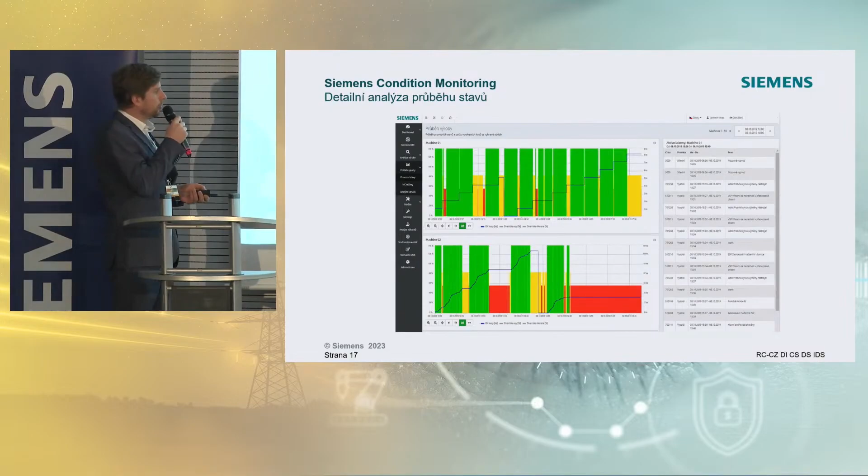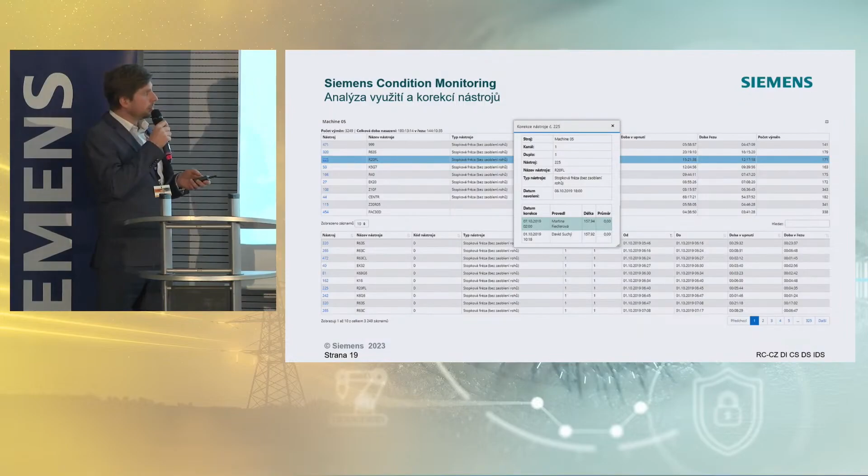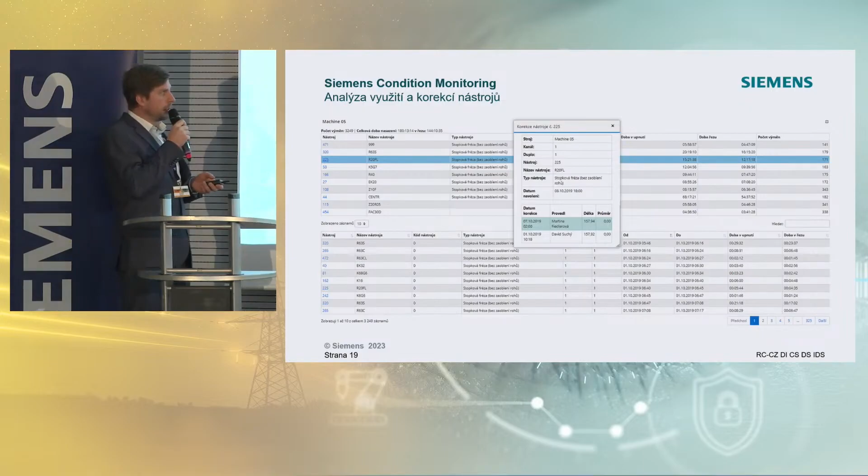Here there are some aids, so all these are the data from BFC which we receive. It is only a form of visualization and processing and the prioritization of the alarms. The information about the machining tools, including corrections, including the length, average, and their changes. This is also very important in terms of the tooling machines, turning machines. Because the corrections are 99% set up manually, and this strongly affects the machine.

This is the information from the drives. This is, for example, the load, the speed, temperature of the motor, etc. These data, we don't see much here, only that they correlate, but these data are necessary for further modules of predictive maintenance if you intend to have those, so they are very important.

Siemens offers modules of predictive maintenance which work with this data, and the system then has an output which is the information to you that with a certain machine, with a certain axis, you have the remaining time of 3 weeks to solve the problem, and if you don't do it, the machine will stop.

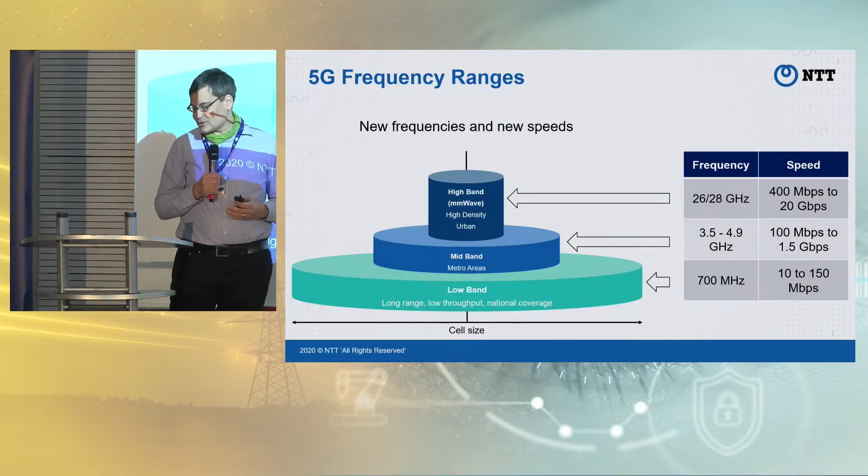So these are high-speed transfers. Here you can get to 20 gigabits. The coverage of a single cell is about 400 square meters. And of course, this band is like a radio connection, a data connection with clear visibility. So the use is when you need really high data transfer speed. So if you cover any space, then you don't need to deal with the infrastructure. You have a quality connection, which basically equals the landline in terms of quality.

So why a private 5G network? What is its added value right now? I've mentioned some of it. It's really about the high-speed transfers, then the latency, which is mainly important for autonomous systems which have control systems elsewhere.

And I forgot to note that the control system for autonomous conveyors is in the data center, because if the conveyor had a server or any computational machine inside, it's quite difficult to cool it and supply it with energy. The service life would be 6 hours, and quite a lot of time would be spent charging the conveyor. Then there's the density of connection.

So you can have about 1,000 times higher number of all kinds of sensors and other network clients who do not really cover the entire spectrum, but all these sensors that report data from the building or any other object. So you can connect this. Then, of course, you have more precise geolocation, so you can be more precise in seeing the position of the clients in the network. Of course, radio efficiency. Well, you have to believe me that it's there, because it would take a one-day workshop to describe this in detail. And of course, the cell throughput, meaning the throughput per cell.

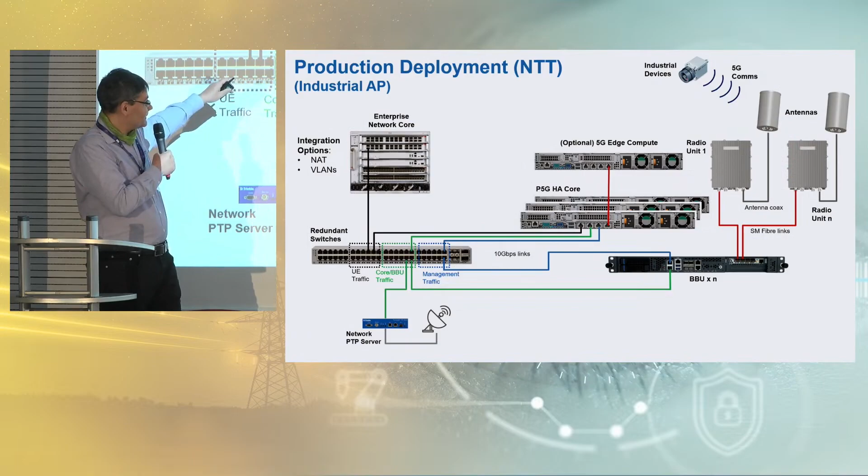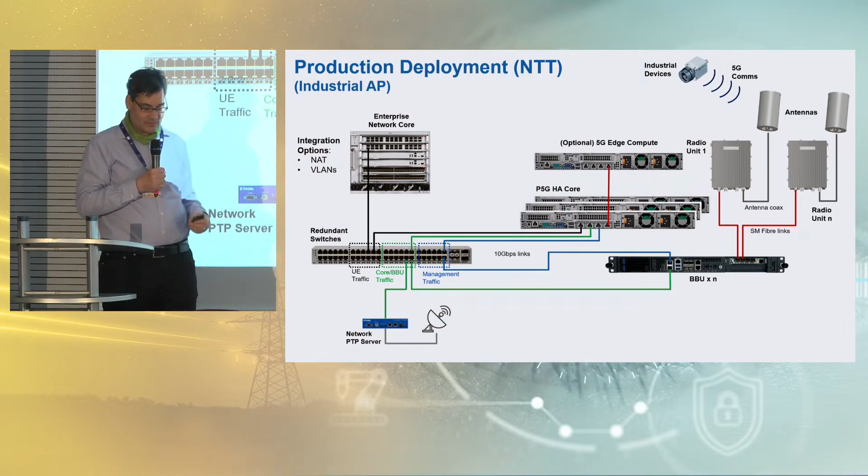So this is how easy it is to connect. So this is where you have the switch, some customer core, and here you can see the packet core, how it's connected to the baseband unit. So over the packet core, the edge compute means that you have the control system. It can be server, all kinds of installations. So this is something that then controls the autonomous vehicles, because you need low latency. So these systems can be connected to the packet core. So this makes you reduce the latency. Then you should use the data center switch, because it usually has very low latency as well.